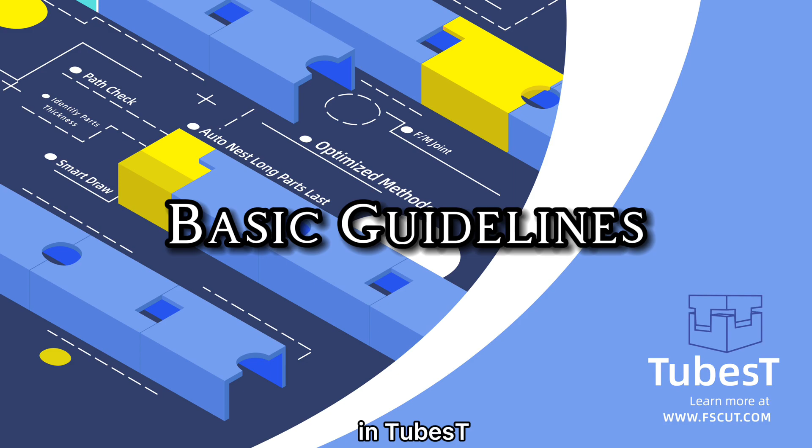This video is divided into 5 parts: import, process, nest, sort, and export respectively.

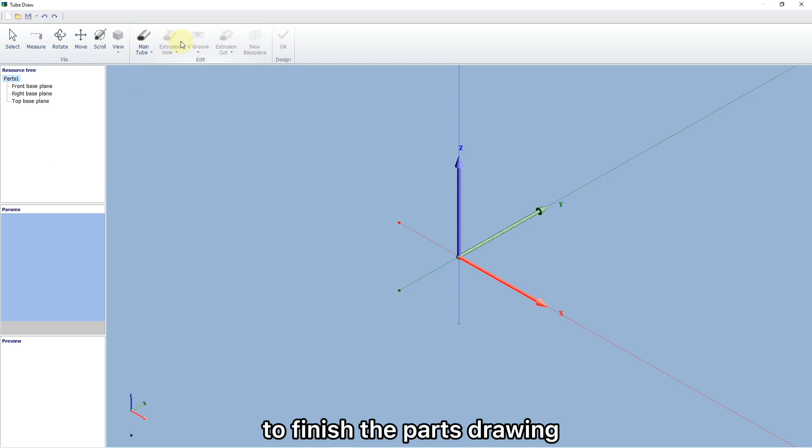The first we are going to talk about is import. After entering this software, the first thing we need to do is edit the parts. Here are some common approaches to do that. Usually, we choose to draw a part manually. Click this option and you will be led to a new page to finish the part drawing. The above are some imported functions, and we will talk about them in detail in the near future.

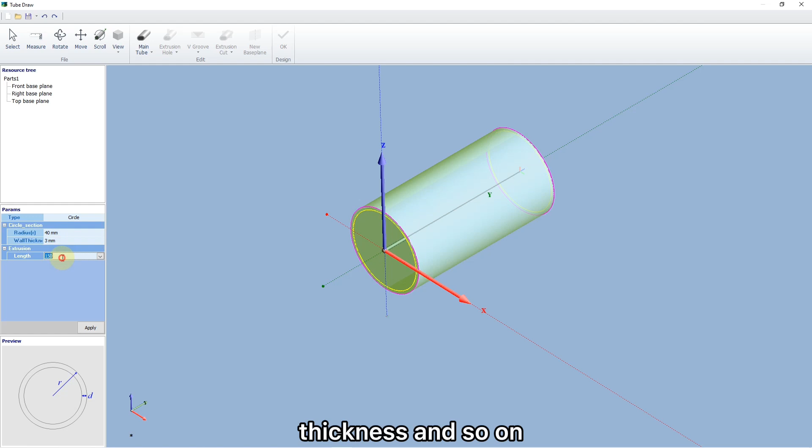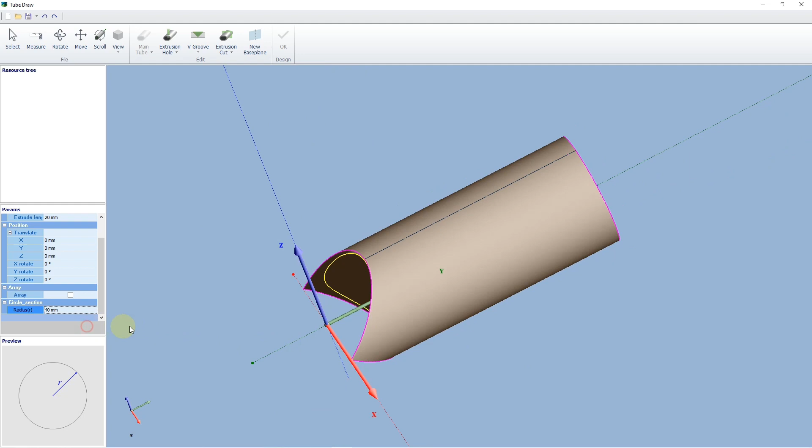Click Main Tube and you can select any shape listed here you want. In this blank, you can change the key parameters like length, thickness, and so on. It also supports adding a subtool with a designated shape, allowing you to realize different effects by changing the parameters here. Click OK to save the change, and then we add a part into TubesT.

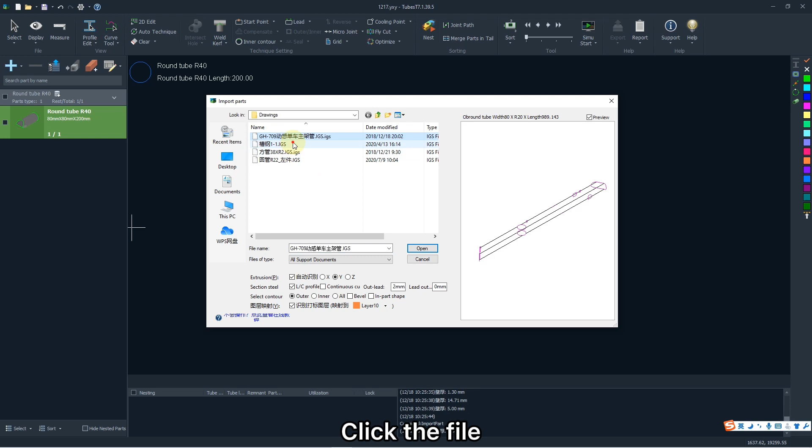There are other ways to import the parts. For example, you're allowed to import IGS and SAT files if the part has been finished in other software. Click the file and there will be a preview over here. You can also click to multi-select the files by holding Shift or Control.

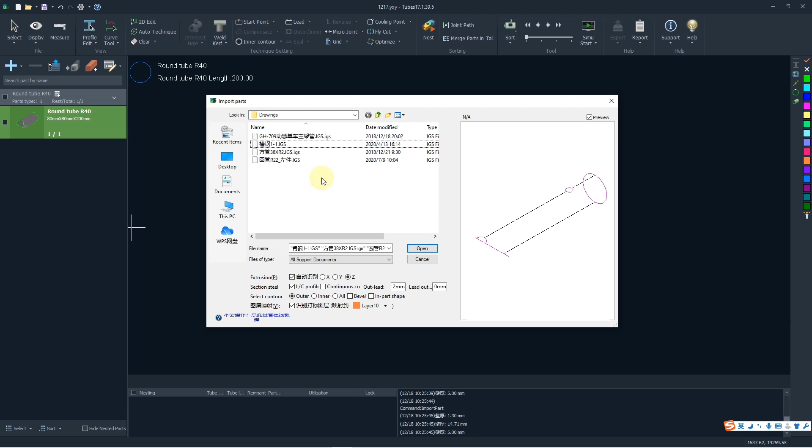All parts selected will be imported at one go. You can browse the parts respectively to check if they are imported correctly.

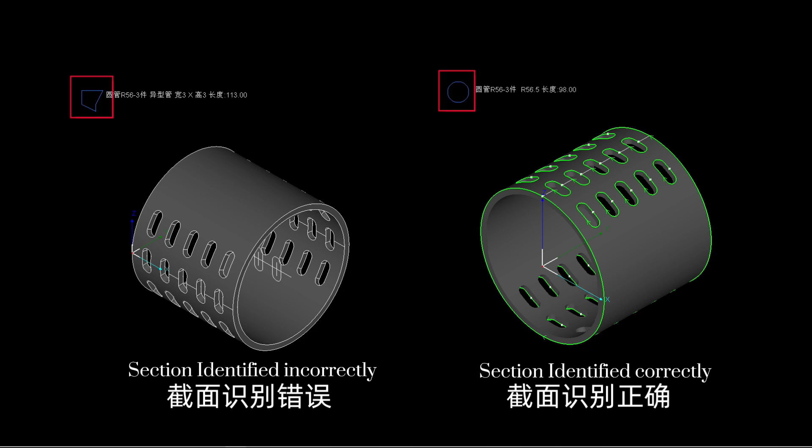To ensure that, you need to get 3 things covered: the section is identified correctly, extrusion direction is along the y-axis, and the cutting path is reasonable. Generally, you need to check if there's no redundant cutting path.

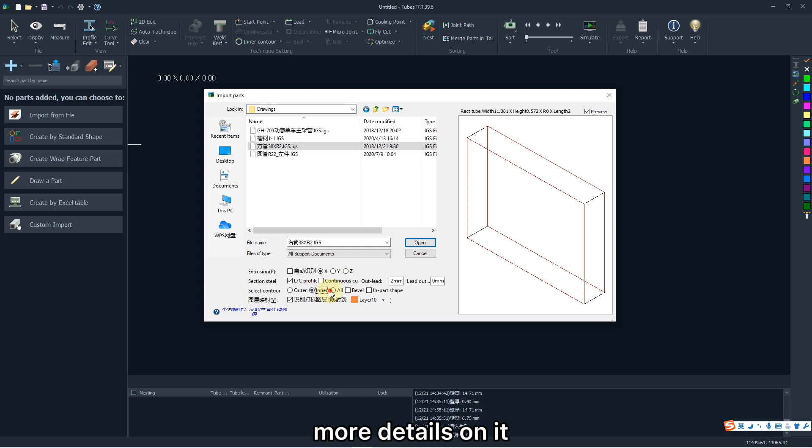If the part imported cannot meet the requirements above, maybe there's something wrong in the imported interface. More details on it we will talk about in the near future, and you can also contact us by email if necessary.

As we can see, the parts imported are listed on the left side in different sections with their previews. At the bottom, there are some convenient functions.

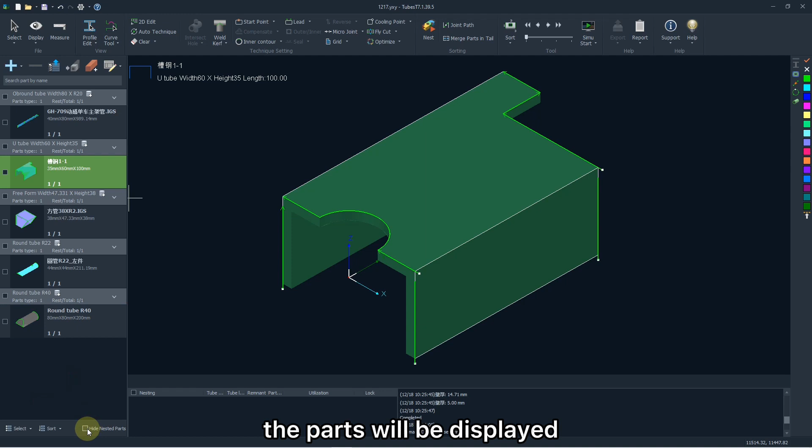Click the corresponding icon and the parts will be displayed in the main window, in which you are allowed to rotate the scroll wheel to zoom in or zoom out.

Press middle mouse button and move the mouse to adjust the view randomly. Press F3 to adapt the window, and press F4 to restore the default view.

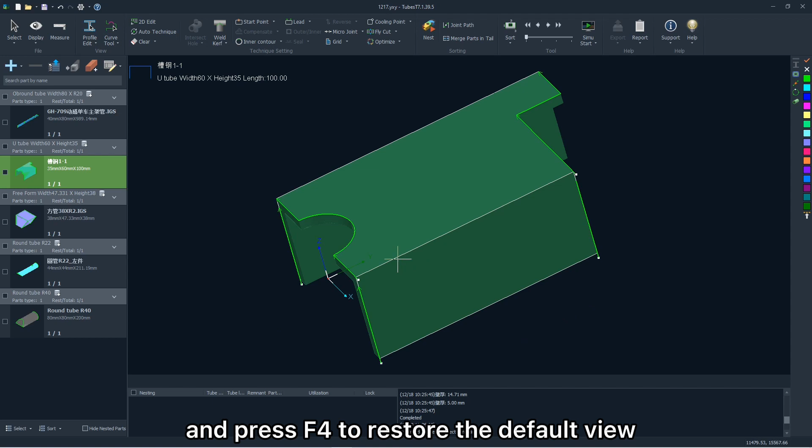Also, to change its view faster, you can double-click the part side and then select any one you want.

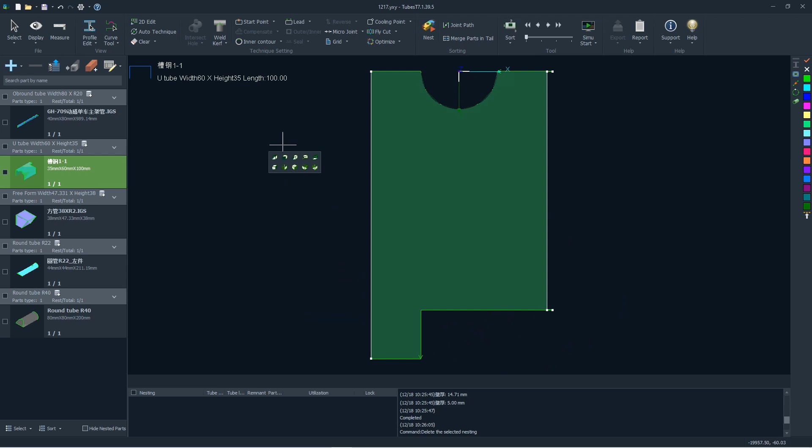Hold the middle mouse button and move the mouse to track the part position in this window.

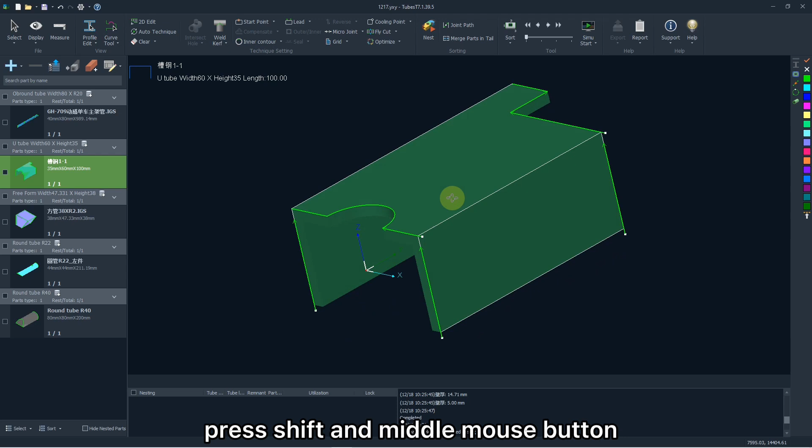Press Shift and rotate the scroll wheel to spin it slowly. Press Shift and middle mouse button to spin it a little faster. Press Ctrl and rotate the scroll wheel to spin it even faster.

Besides, you can click Display to modify the visual effect. Also, the interface skin and language are changed here.

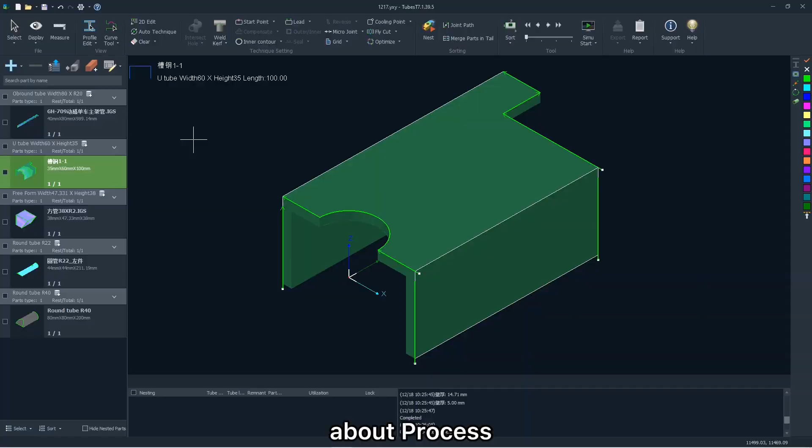Next, we are going to talk about the process, which has the capability to change the cutting path or direction by knowing the parameters of speed, gas, or something else in the cutting software. I will talk about some of the most common processes, like lead lines.

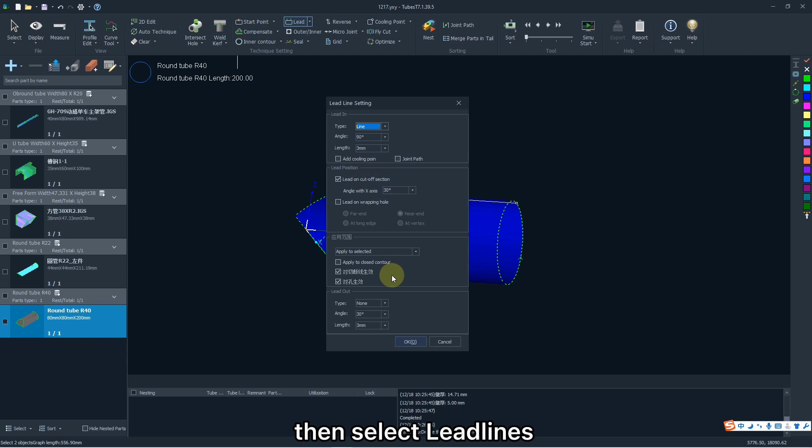Click a specific cutting path or whole part, then select lead lines and make some changes here. Click OK to generate the designated lead lines.

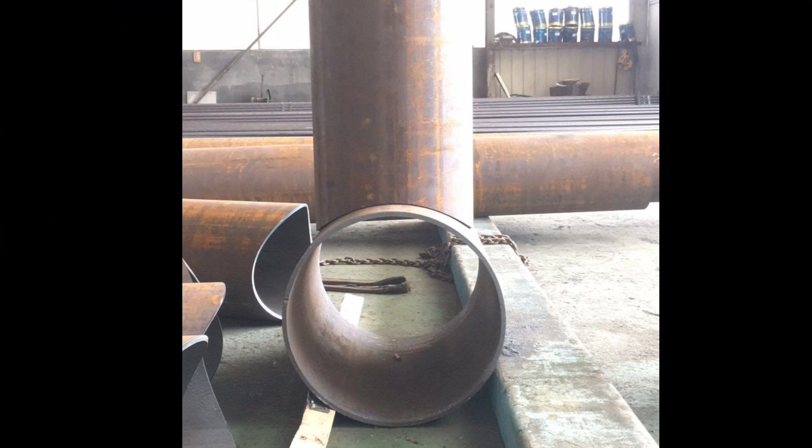Also, there's compensation for special parts to be jointed into a T-shape like this. If you just cut it according to this kind of cutting path, there will be interference due to the differences between the inner and outer contour. To solve it, we can add a weld kerf here. Then TubesT will automatically generate a special cutting path to offset the interference.

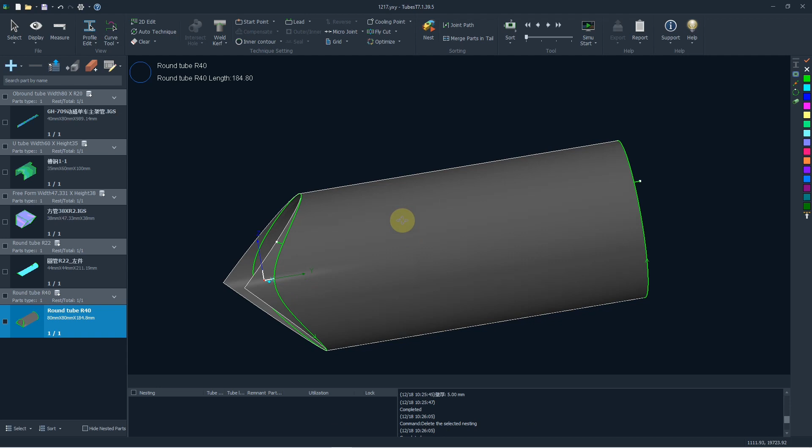Besides, there are many processes in this software. You can enable specific ones in auto technique. TubesT will remember settings in the future and will apply them on the parts imported or received. We will talk about it in detail before long.

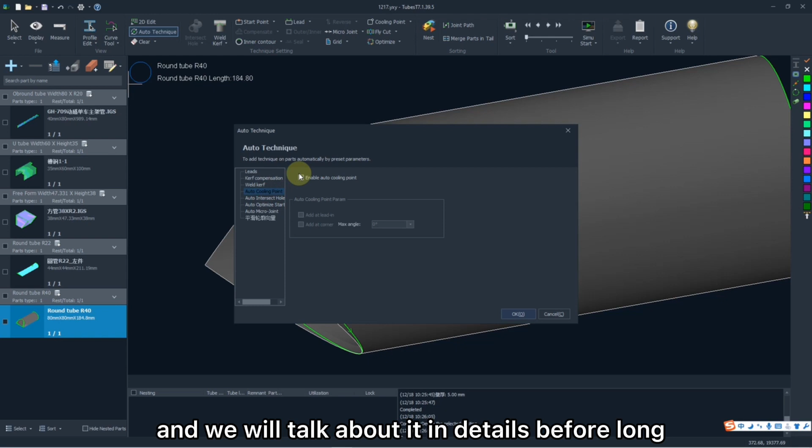Auto nest plays an important role in TubesT. Before that, we can make some batch operations to modify the part's name, amount, and if added, the text wrapped on the tube automatically.

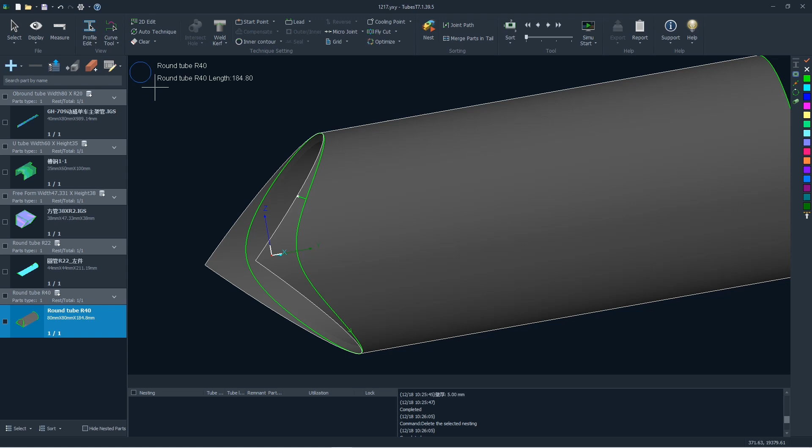And you are allowed to make some changes here.

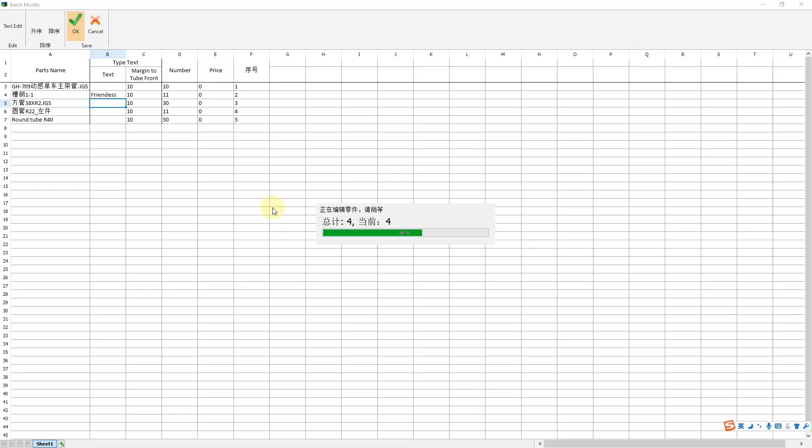Moreover, you're allowed to change them by clicking here, and also copy or even re-edit the part.

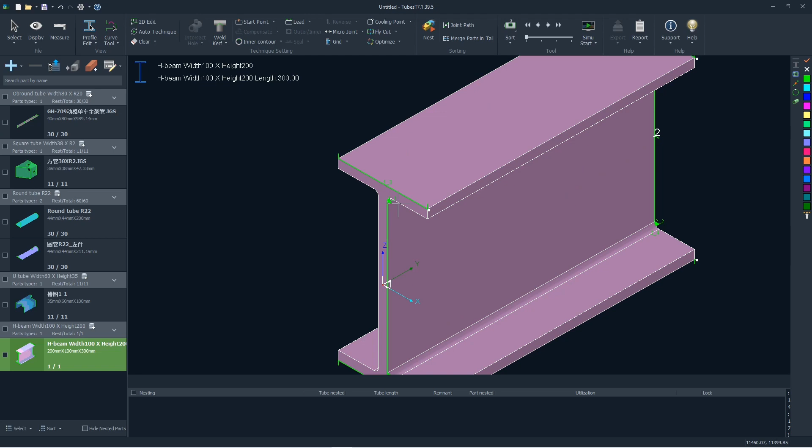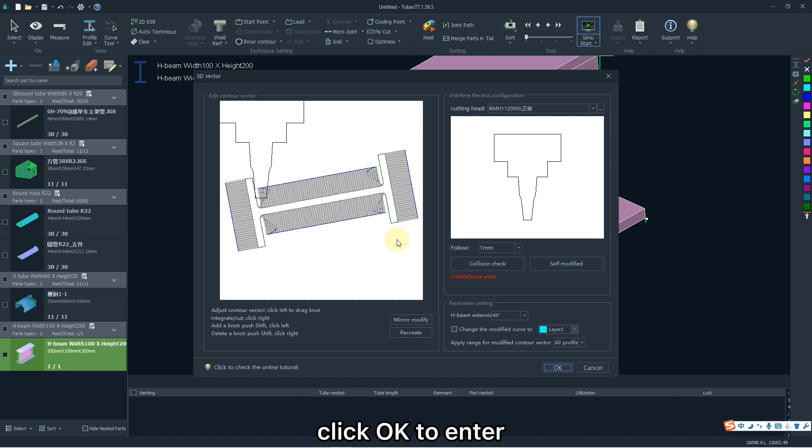For special parts like I-shaped ones, there may be interference in the cutting path. If you simulate it directly like this, TubesT will give you an error notification. Click OK to enter the 3D vector window. Here you can have a collision check, and you can choose self-modified or not according to the actual result. But if you don't, the 3D vector will be modified automatically and correctly.

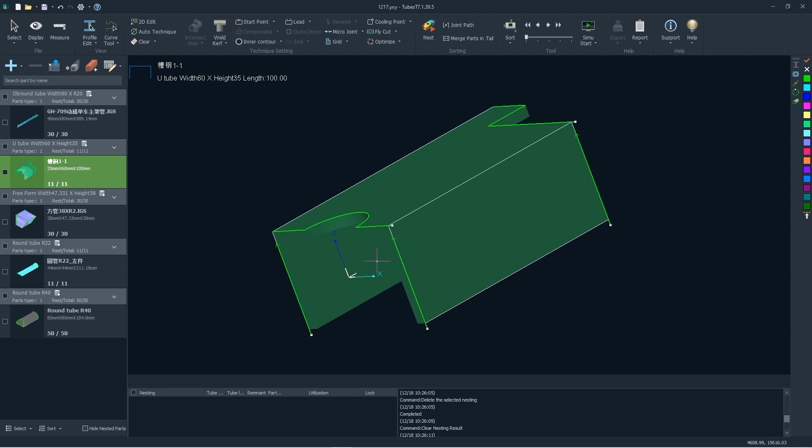Click Next. In the pop-up window, here is the tube information, including the length, dead zone, amount, section type, and remnant.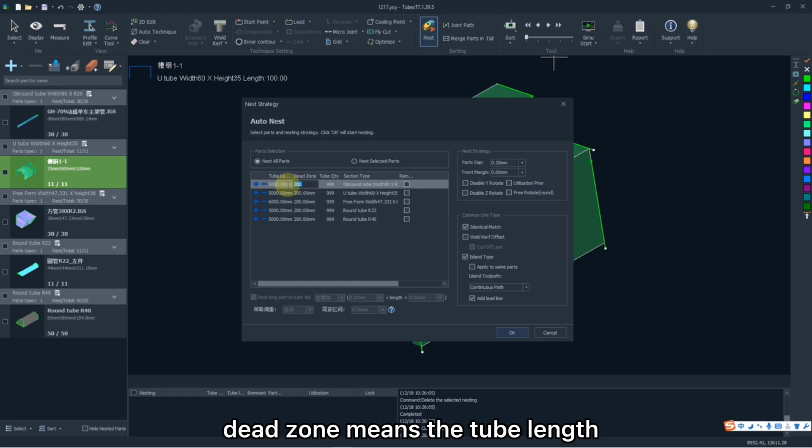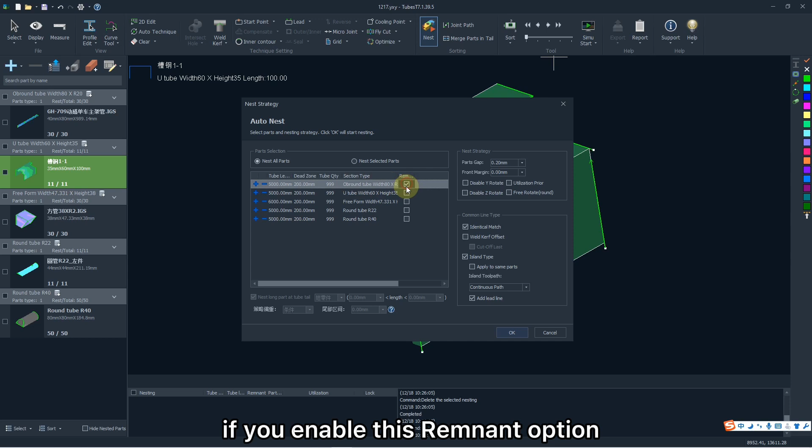Among them, dead zone means the tube length which cannot be cut, as shown in the diagram. It is necessary to get it right. The tube amount is suggested to be sufficient enough so that the parts can be nested completely, and the parts with different sections will be nested on different tubes. If you enable this remnant option, the corresponding tube will be considered as the scrap tube, which will be nested in the first priority.

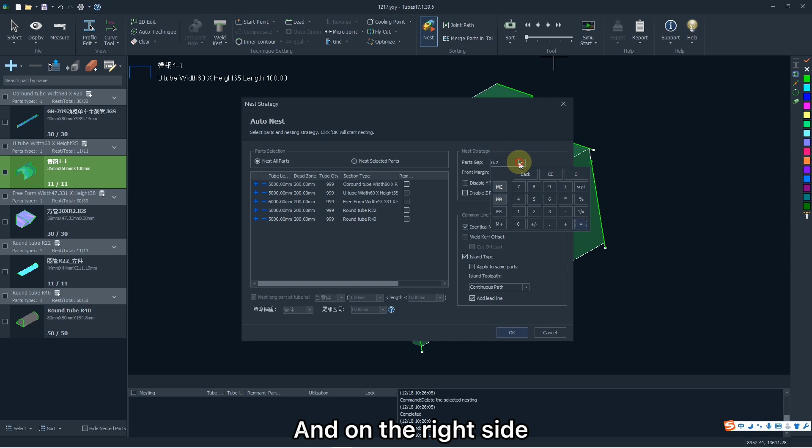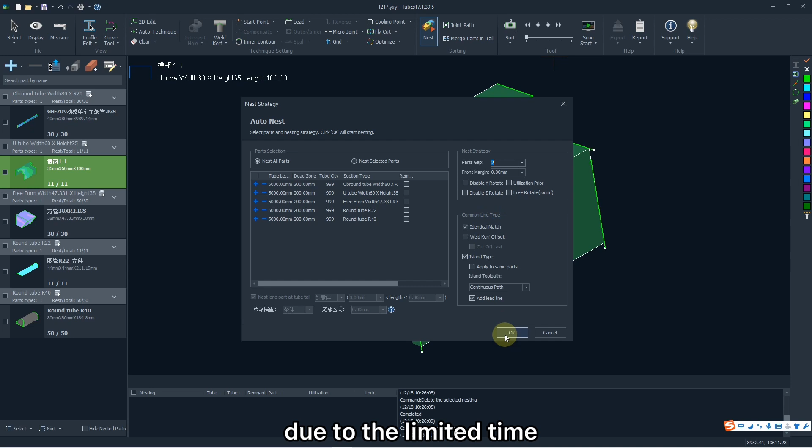On the right side, part gap means the interval between every two parts if you don't enable common line. But if you do, this parameter will be invalidated by default. Generally, you are suggested to enable identical match. As for the other functions, today we are not going to describe them in detail due to the limited time. Click OK to start AutoNest.

Here you can see that the part without common line has an interval, which we set just now, and the part with common line, this option is disabled.

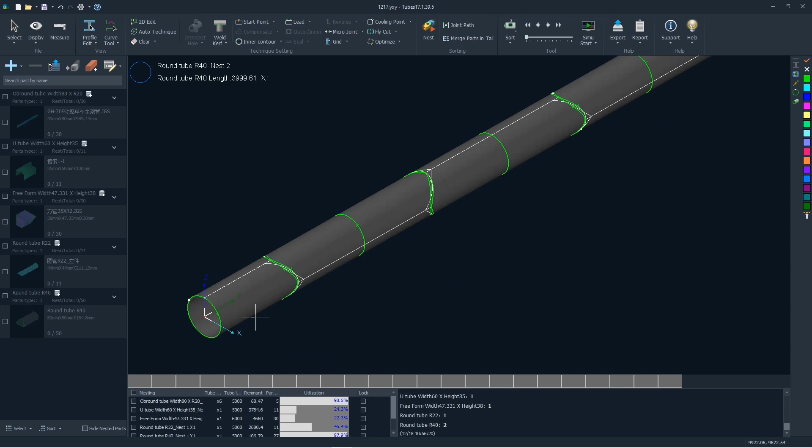The bottom is the nesting result zone, including some main information in which every line corresponds to one kind of nesting result. Double-click it to have a check.

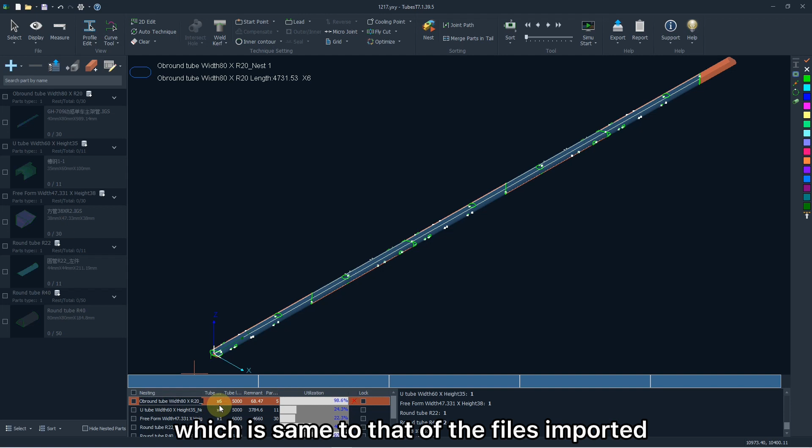Here you can see the nesting name, which is the same as that of the files imported, including the section type, size, fillet, and cutting time. Cutting time means the time the parts will be machined.

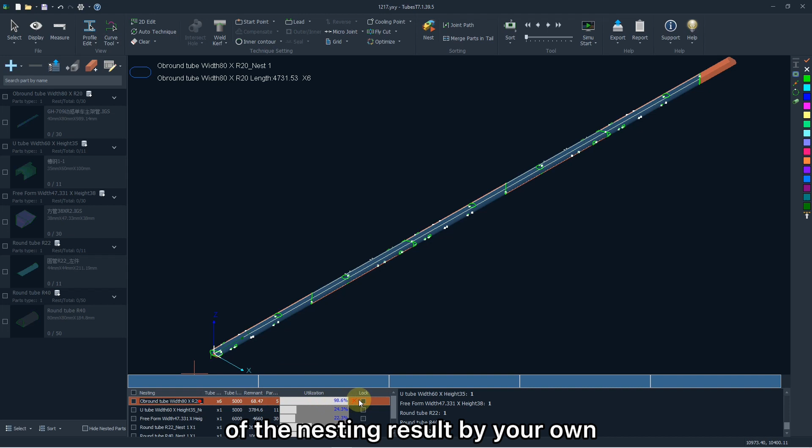Theoretically, it cannot be modified directly unless you change the parts amount first, so it is unnecessary for you to calculate the cutting time of the nesting result by your own. Also, the tube length, parts amount, and some details will be shown here, and you are allowed to change the blanket size manually.

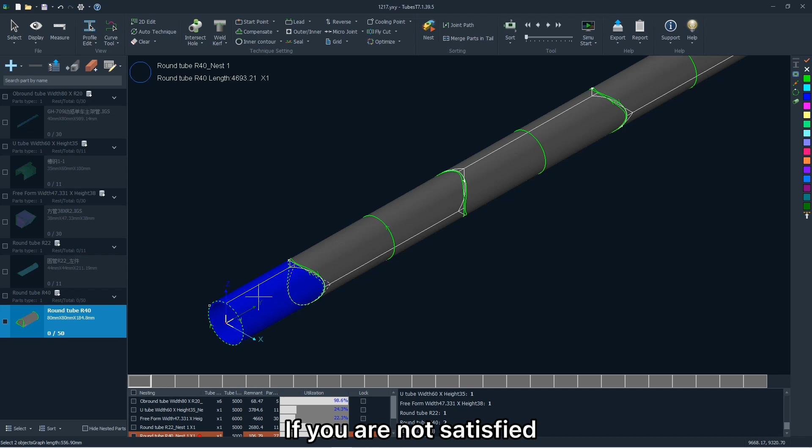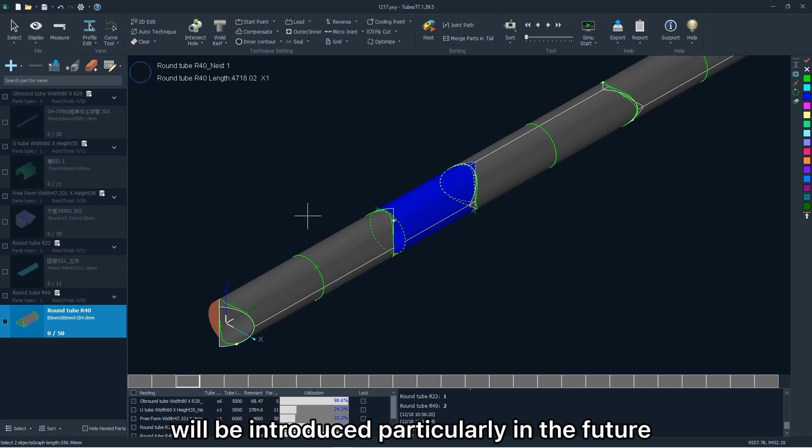If you are not satisfied with the current nesting result partially, double-click a specific part. There will be some operations here to adjust it, like moving it forward and backward, or rotating it clockwise or counterclockwise. More details about the nesting strategy will be introduced particularly in the future, but if you have any questions, please share them with us by email.

The next is sort. Theoretically, TubesT will sort the cutting path automatically from the top to the tail of the tube, but you are allowed to sort it according to different strategies.

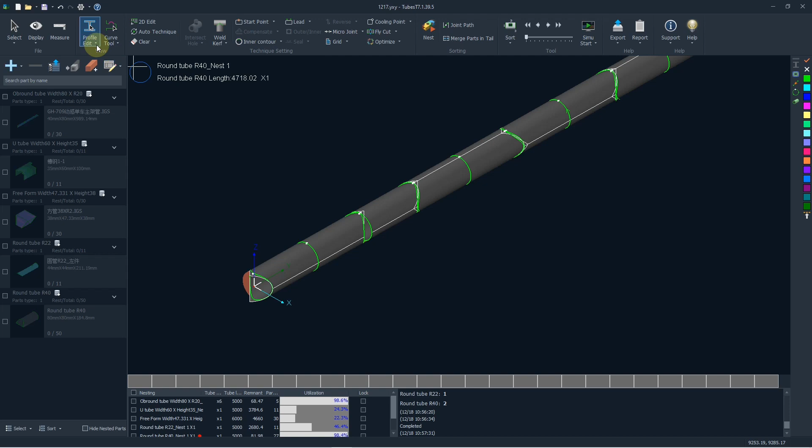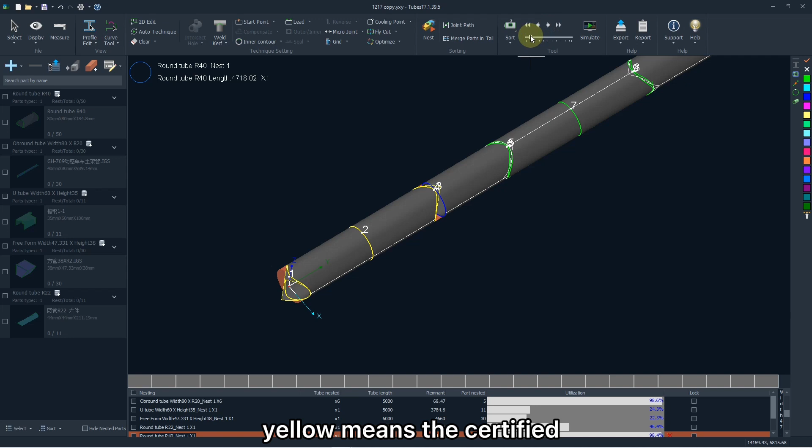To verify the cutting path is reasonable, click here to enable the Display Sequence tag to check the cutting sequence. Statically, you can click the inner arrow to verify every cutting path manually. Yellow means they're certified, blue the current, and green the to be certified.

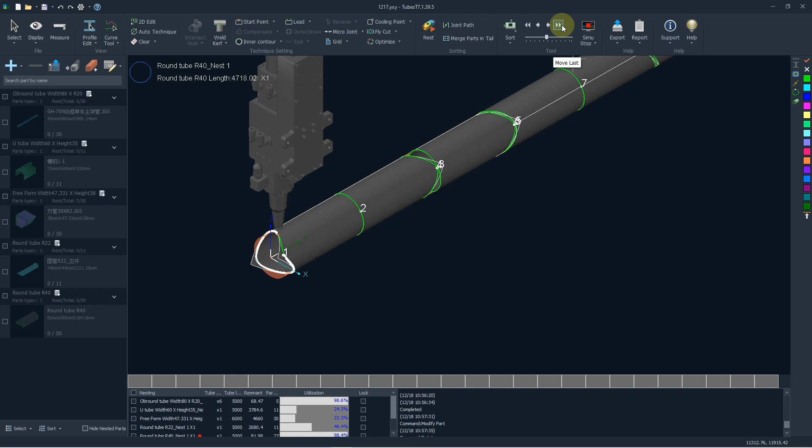Dynamically, and more vividly, you can click Simulate to generate a virtual cutting head, which can be customized to simulate the actual cutting. Also click the arrow to adjust the simulating speed. If you select one or a group of cutting paths, this specific part will be simulated only.

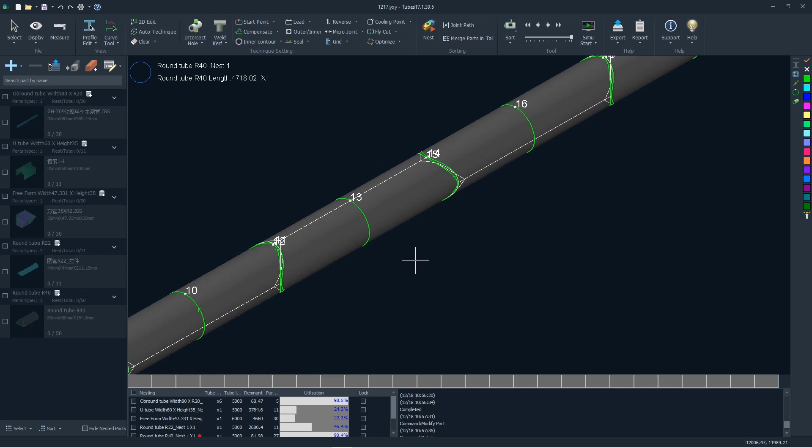Next we are going to talk about export. Click this icon on the left top of the interface. TubesT will export a file in YXY format, which is not used for cutting software, but an engineering file for nesting. It will save all the results nested, parts imported, and the processes added.

If you want to modify it slightly, like changing the cutting path partially, just open this file, which saves much redundant operation. Then you're allowed to continue the editing saved at a later time.

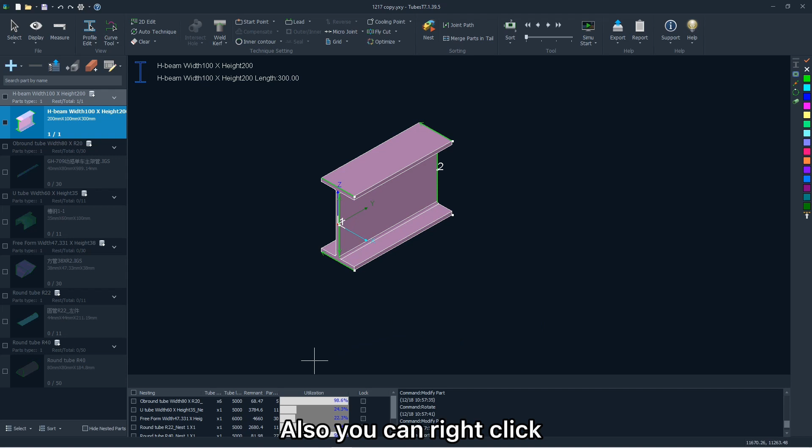Also, you can right-click the nesting result and click Export to generate specific files: ZX for TubePro, CTDS for CypTube.

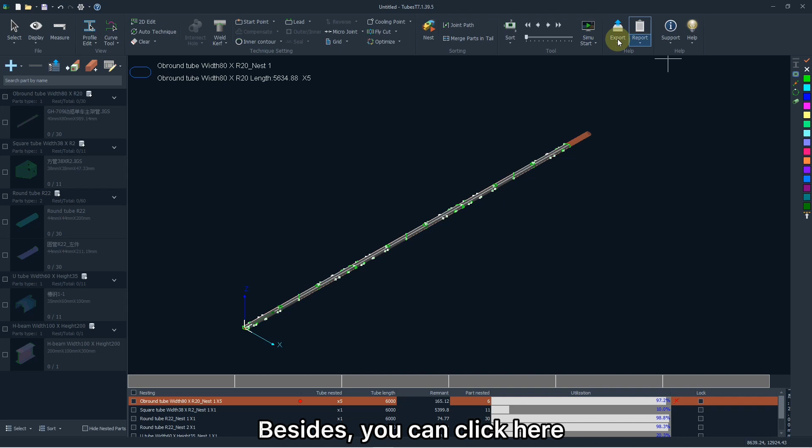Besides, you can click here to export a task package, including a group of files in ZX format. But it is necessary for you to use the TubePro in a version corresponding to TubesT.

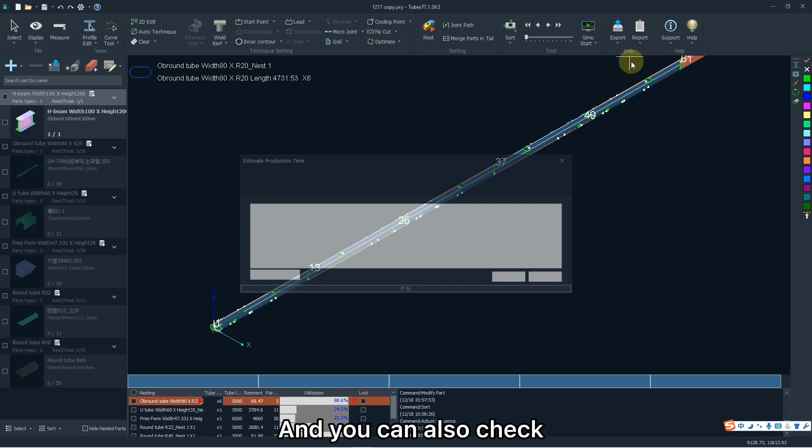And you can also check the time estimate for specific tubes. Parameters here can be customized by yourself.